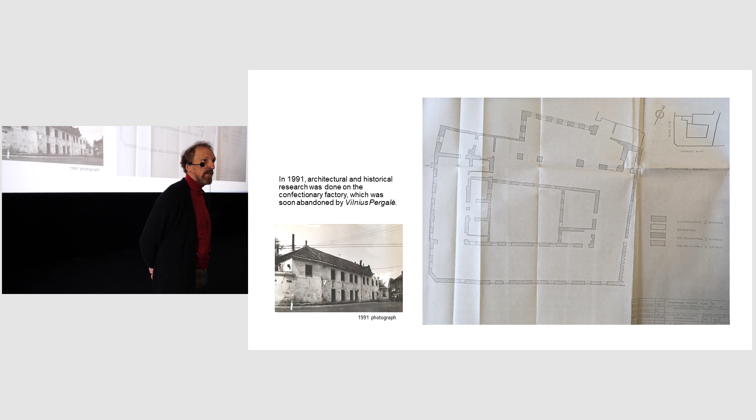We worked through Senojo Miesto Architektai, which we've been doing since 2005. There had been historic research done previously in 1991. The factory was still in operation, although at the tail end of its operation. We reviewed as much of that information as we could. It was very thorough, as thorough as it could be at the time.

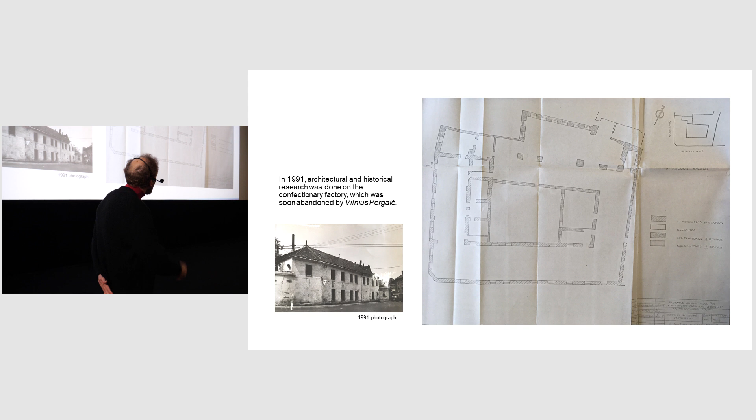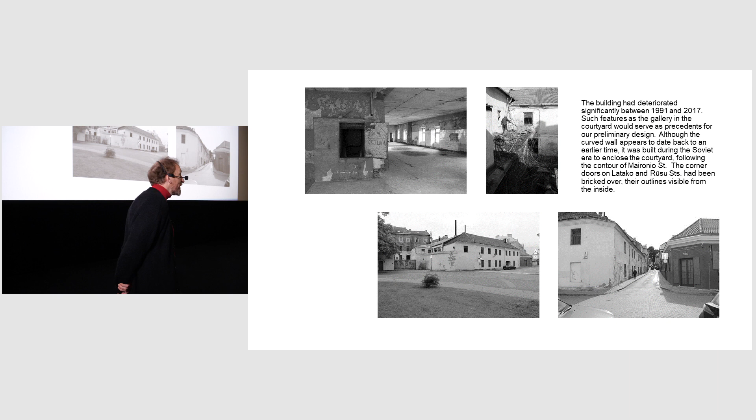You can see it simply divided, not so much by years, but by styles. After the factory moved to a new location, the building began to fall into ruin. It was already in fairly bad shape, but now it began to deteriorate rapidly. For 26 years it sat there on the corner, basically like a dead building.

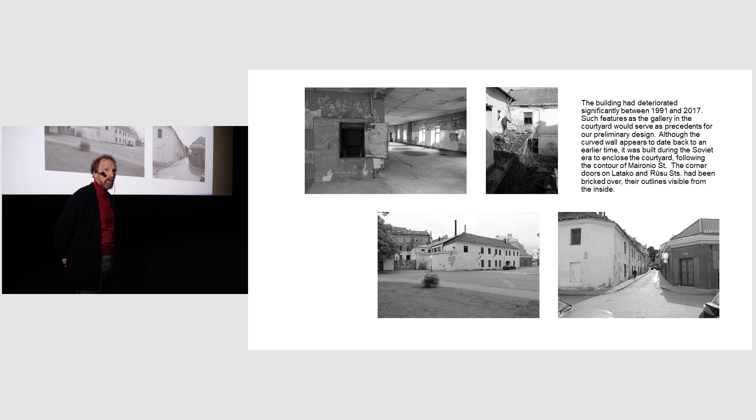But it is within the historic quarter, within the UNESCO World Heritage Site, and considered an integral part of it. It didn't have any unique number as of yet, but its fabric was considered important and needed to be thoroughly researched.

So in 2017, we initiated additional architectural research, archaeological research, historic research, and geological research to try to understand this building in more depth, particularly its low water table. This building was only 2.5 meters above the water underneath, and it was very close to the river.

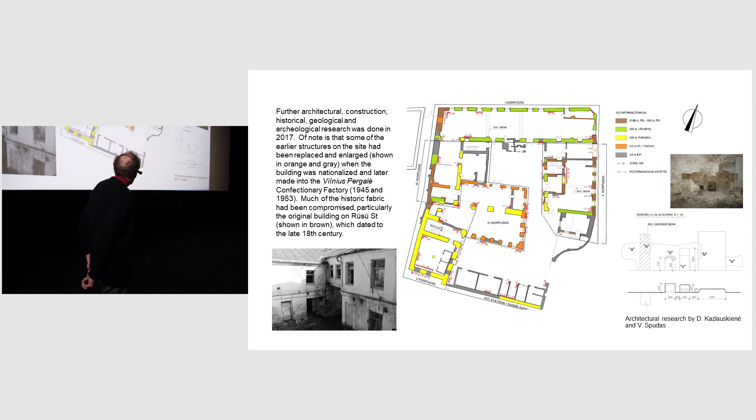You can see we had much more detailed historic and architectural research done at this time. We could very much see that this building was cobbled together over many years, roughly 200 years of additions. It's very hard to see what is original and what is not, because it's been parged over with plaster.

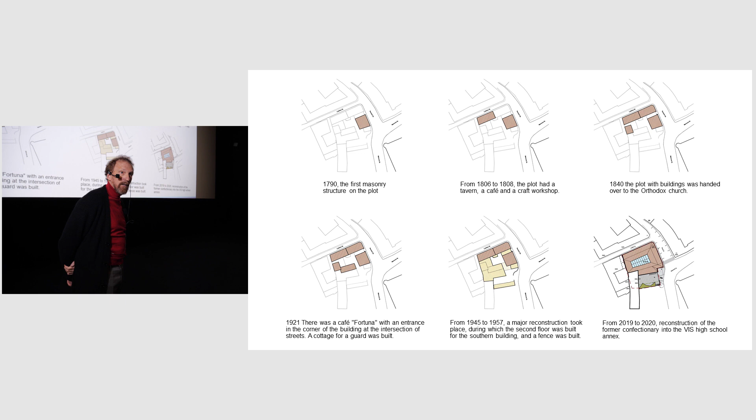Through the research we were able to divide its chronology of how it began. This building dated all the way back to the late 18th century. There was a one-story building on Rūsų gatvė, part of the old merchants and craftsmen's area in the Ruthenian quarter of the city. It began to slowly be added on to, becoming basically a crafts district, with merchants operating in it as well.

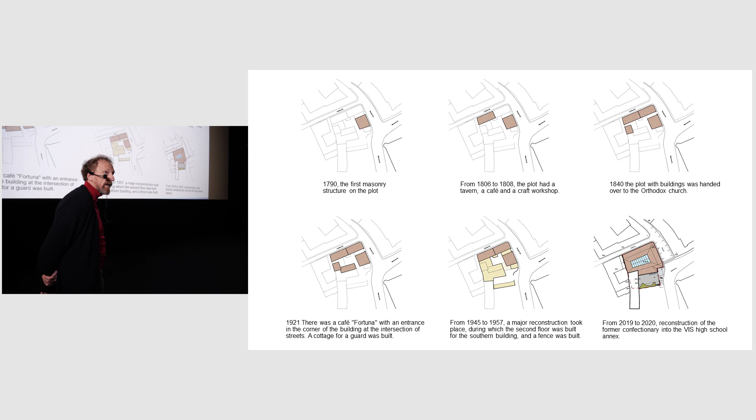In 1840, the buildings were ceded over to the Orthodox Church, which began to rent out the spaces to merchants and craftsmen. It continued to grow throughout the 19th and early 20th century, when it was made into a chocolate factory, the Fortuna chocolate factory.

The major renovation took place in the mid part of the 20th century, during the Soviet era, when Pergalė took over the building and added what you see as those yellow parts. Part of that was using a combination of historic walls and new walls. Finally, our conversion of the building in 2019, 2020, to what it is today.

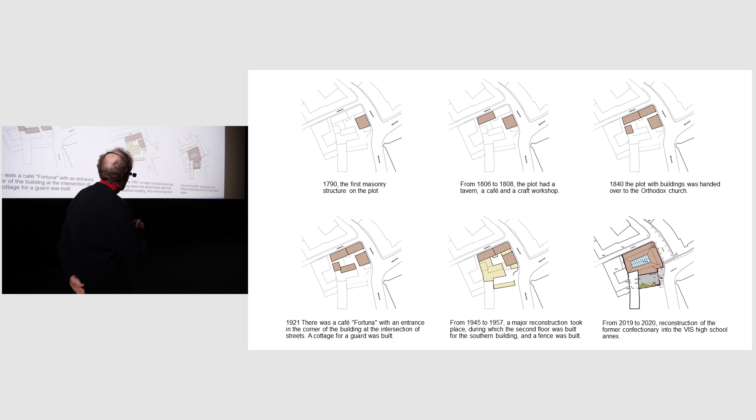Initial archaeological investigations revealed basically a whole little community underneath the building. We found wooden foundations and stone paving that dated back to the 16th century. These were just small pocket archaeological digs done at the time, and we knew we would have to do much more thorough archaeological investigation once construction began.

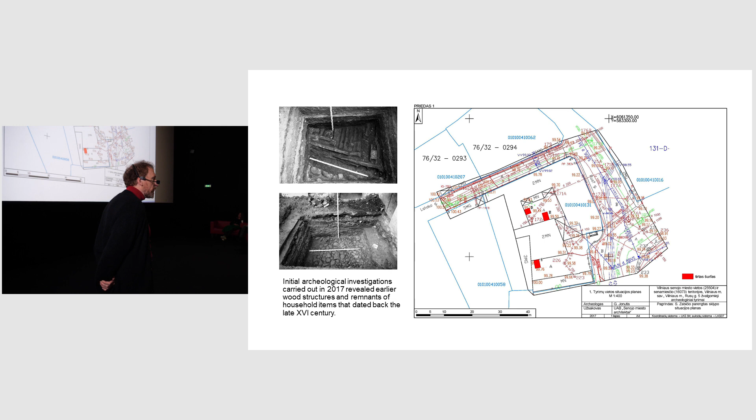But at least it gave us some idea what we were dealing with, and also helped us locate the water table of the building.

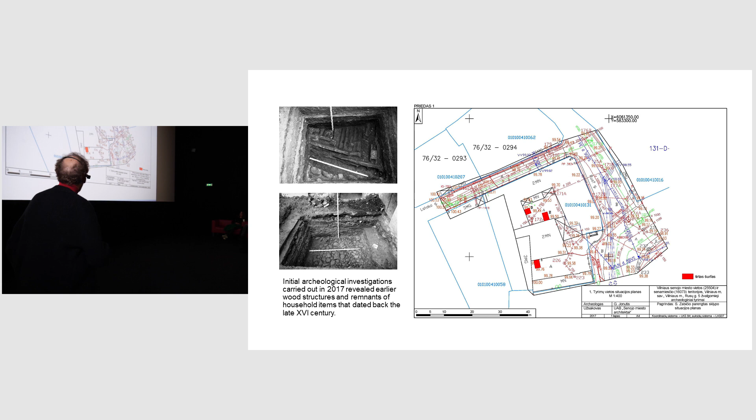Our initial conception went through several schemes, but finally we decided upon enclosing the whole building, turning it into a tech incubator. The idea was to make something that didn't look like a high school, something that would spur high school students to feel they were more part of a tech environment, especially given all their reliance on cell phones and everything else. We thought this would be a more exciting environment for them.

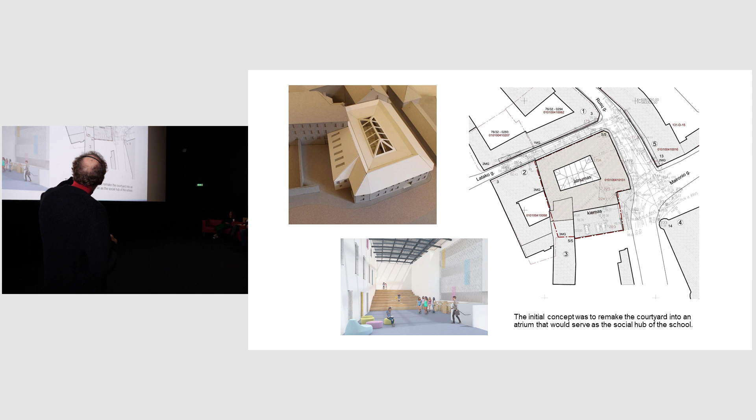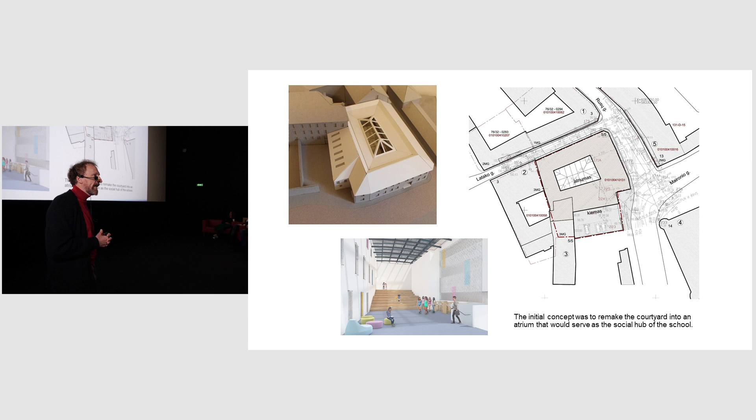Part of that concept involved turning the courtyard into an atrium, because that atrium we felt would be the congregation hall, the meeting area, where they could put on plays, put on any kind of functions they wanted, or just generally meet and discuss.

The school itself had a very liberal style of teaching, kind of modeled after the Finnish system. They didn't really have divisions. The idea was to bring students and teachers together on a constant basis, making it a more informal setting.

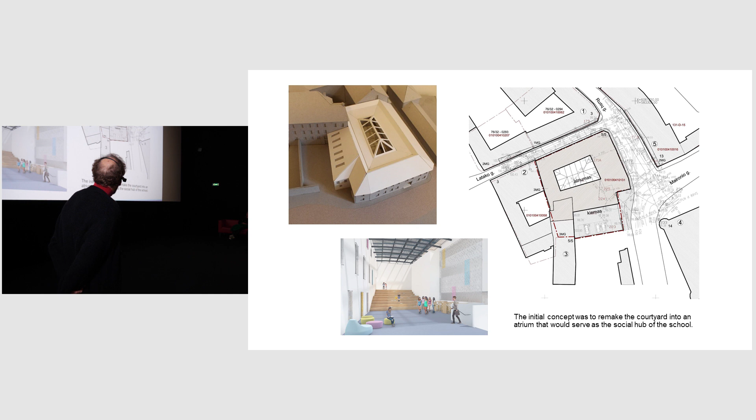Part of the problem we encountered was that as soon as we closed the courtyard, it became part of the square meters of the building. The Cultural Heritage Department told us that we couldn't use more than 80% of the footprint, so that meant we had to cut in on the walls.

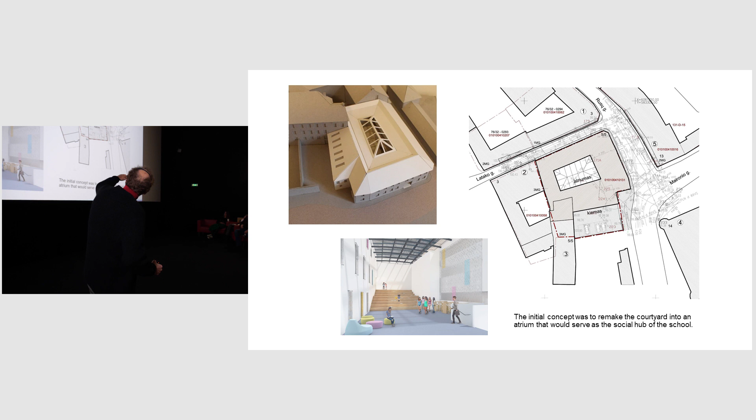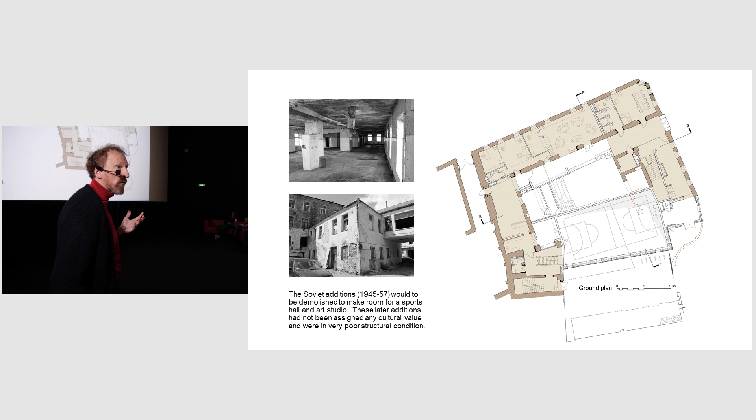What we basically did is we eliminated the Soviet addition. The Soviet addition was very hard to work with. It was not considered valuable, so we eliminated this portion of the building, and in its place we built a new construction, which was a new sports hall and art studios.

As a result, you can see with a red dotted line here, this was the original footprint. We had to shave in along the walls here and also not use the utility rooms here so that we could count the atrium space. Otherwise, it would have to stay a courtyard.

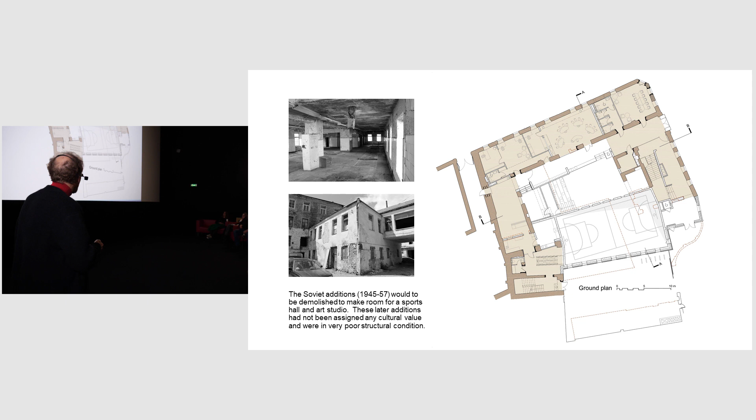So our initial scheme, of course, was to retain as much of the historic fabric as we could, to attain its original appearance. We were also limited in terms of roof height. We couldn't exceed the existing roof height of the building, but we still managed to squeeze an attic into that space.

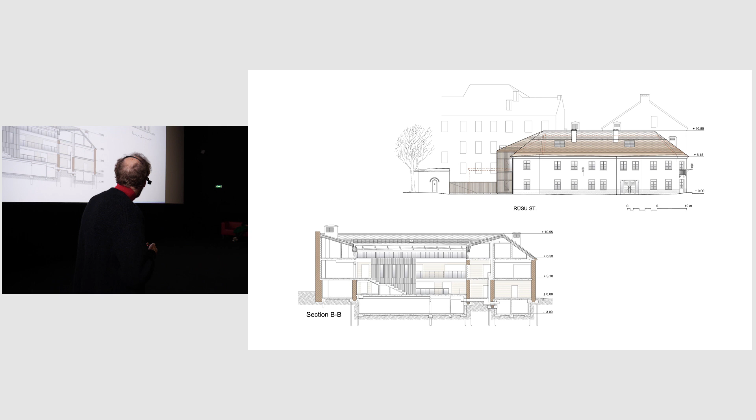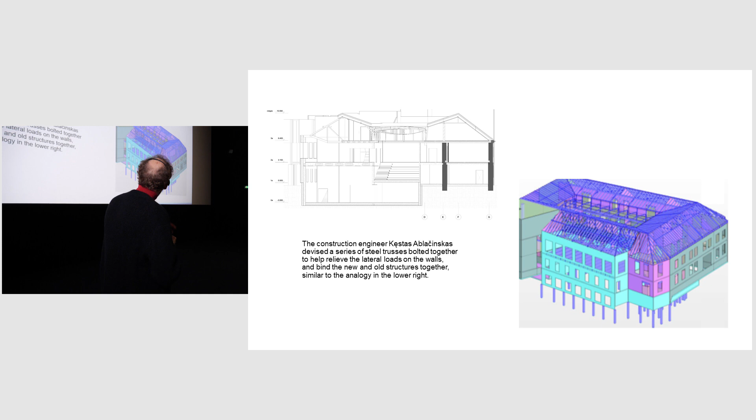In order to achieve this, especially since those old walls had been worked on so many times, they were not in very good shape, so we had to come in and shore up the entire foundation all the way around the perimeter. Our construction engineer, Kęstas Ablačinskas, devised a very elaborate metal truss roof system that essentially combined the old walls with the new walls.

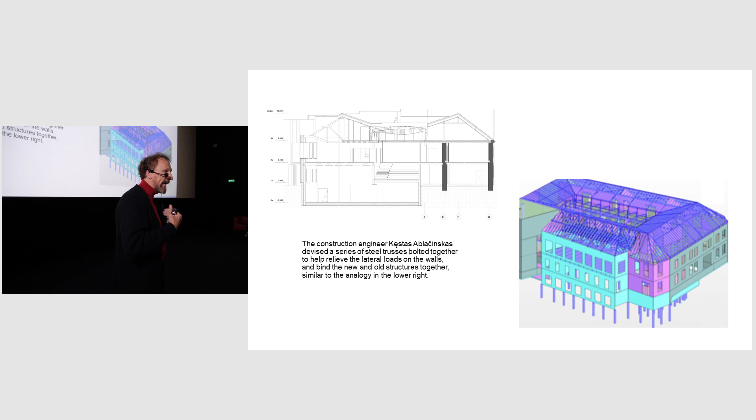Held them together into one, with the new concrete walls sort of acting as the anchor to that roof. And in this way, we could eliminate lateral forces that would potentially destroy the walls over time.

Because of the nature of the building, the open spaces, submerging the sports hall, we had to do a very thorough investigation on fire safety. Initially they were not very keen on the idea of an underground sports hall. They typically don't like that.

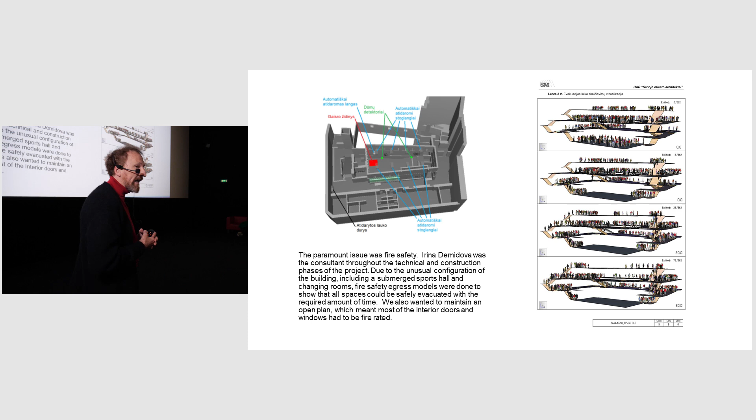But we'd already done a similar project with a sports hall with American International School. So working with Irina Demidova, we came up with all these 3D diagrams showing that all the students could be safely evacuated within the required time.

Then of course we did a thorough tvarkyba on the building, combining Kęstas' construction research along with Dana, who did the architectural research, in terms of tvarkyba, restoring the facades, waterproofing the base, trying to protect those walls as much as possible.

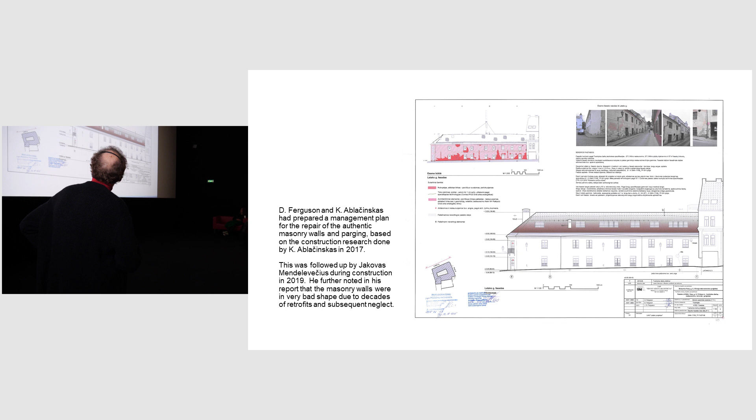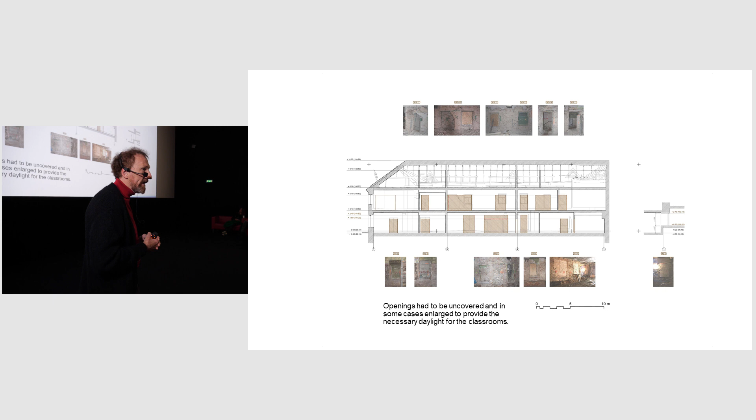Another issue that came up during construction was light. We have this now is going to be classrooms, and there are very strict regulations on the amount of natural light that you have to have into these classrooms.

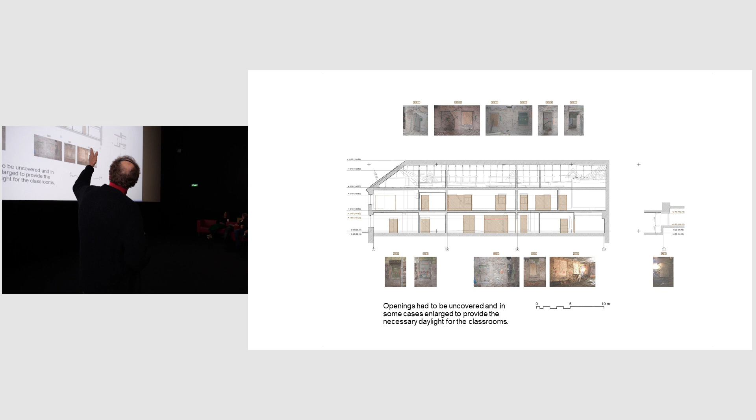So as a result, we had all these historic openings that had been bricked over during the time of the fabric, when it was made into a factory. So we opened them all back up again, and in some cases combined 2 openings into one so that we could get as much natural light into all the classrooms at all levels as we could.

And construction, demolition first began. Demolition had to be very carefully done because the building was not only very fragile, but there were people living above in the segments, or in this, it was a 4-story building in the corner.

So there were residents above that. We didn't want that to fall in. So there was a lot of effort done to stabilize the building in the process of demolition as well.

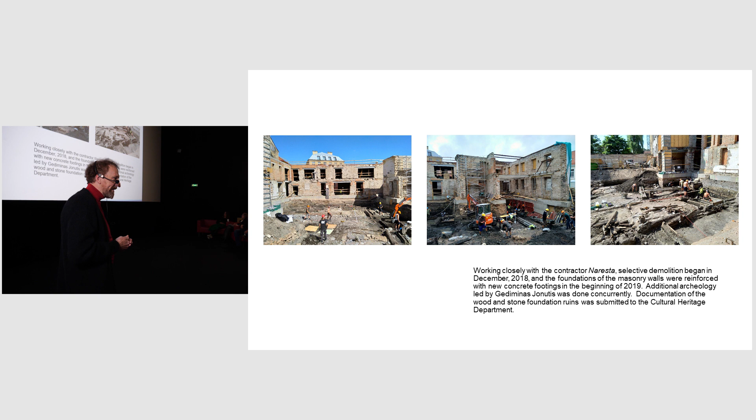You can start to see the village that emerged from the dig, with all the stone pavings, all the old wood foundation walls, lots of animal skulls, so there was some kind of farm element taking place underneath here as well. It was all thoroughly documented by the archaeologists.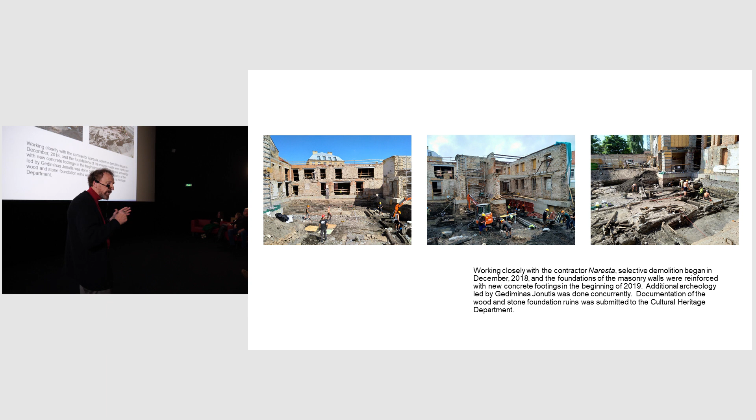Once the archaeology was done, which spread out through the entire summer into the fall, was about an 8-month process. It was very exhaustive and very painstaking. We could finally begin to bring the building up from the ground.

And because the building is very three-dimensional, there's multiple levels, not only just in terms of stories, but split levels as well. It was quite complicated, trying to get it all coordinated and make sure that all the pieces fit together properly.

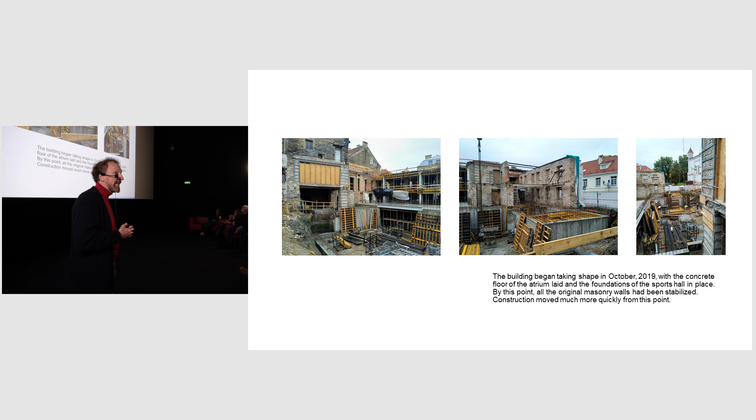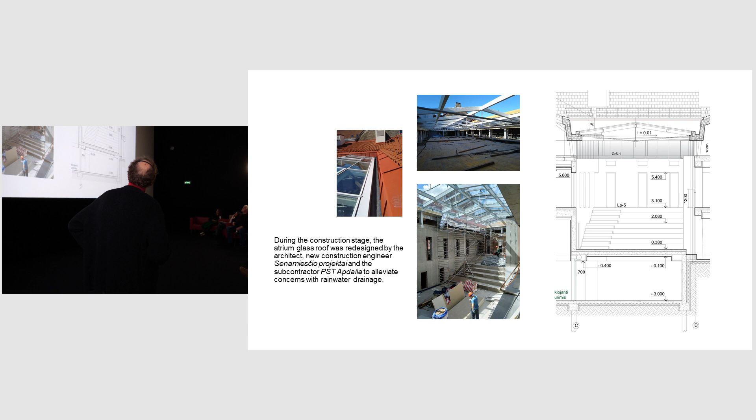As you can see, problems began to arise. One of the questions was the atrium roof. The contractor didn't like the design that we initially proposed, so we went through multiple variations to come up with a roof that everybody was comfortable with, that shed the water.

One of the interesting requirements within the Cultural Heritage Department is that the skylight has to be lowered. You have to create the illusion that the courtyard is still there, at least from an aerial view. So of course, when you sink the skylight into the roof, you basically create a pool, so this has to be drained, especially in winter with snow loads.

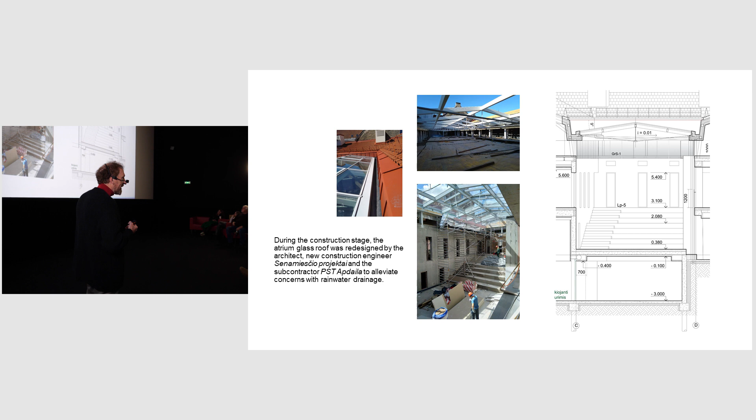So here we had to not only have proper drains all the way around, we had to heat them to make sure snow didn't stay on top of that roof during the wintertime. Fortunately, after 3 years, the roof is still not leaking, so it was a successful situation.

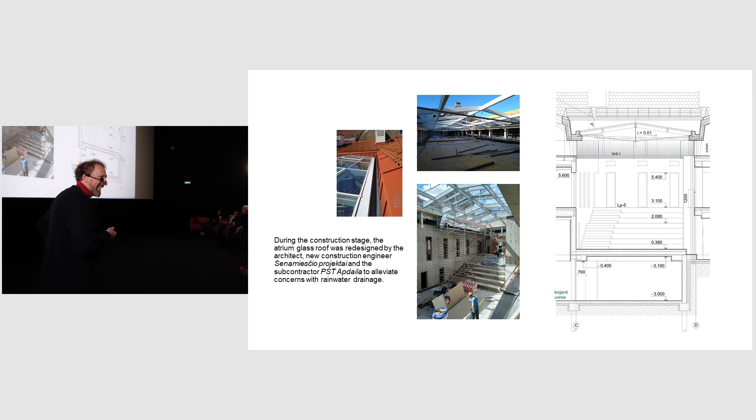And now we get to the interiors. We tried, as you can see, especially in that stair hall, where you literally see all the layers of construction. You see about 6 different layers of brickwork going on here. It wasn't like you had any perfectly preserved wall from the 18th or 19th century. All these walls had been worked on repeatedly, patched over, windows filled in, etc.

We even found an old fireplace that existed in one, so we kept that fireplace. As much as we could, we tried to expose the brick to give it a sense of warmth, especially in contrast to all the cool colors that were resulting.

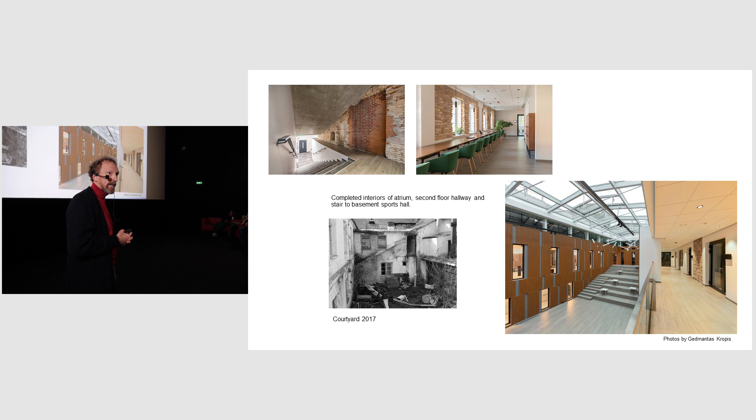And in the atrium, to help deal with sound issues, we used these perforated simulated wood panels, because we couldn't use actual wood panels for fire safety regulations. The idea was to soften that sound in that space as much as possible so it wouldn't become a reverberation chamber. We worked closely with Ecophon on a lot of the ceiling, especially in the sports hall, with their different types of paneling. And it worked very well.

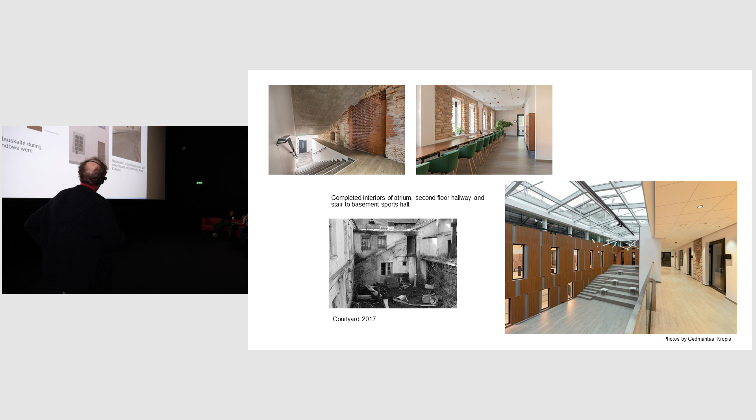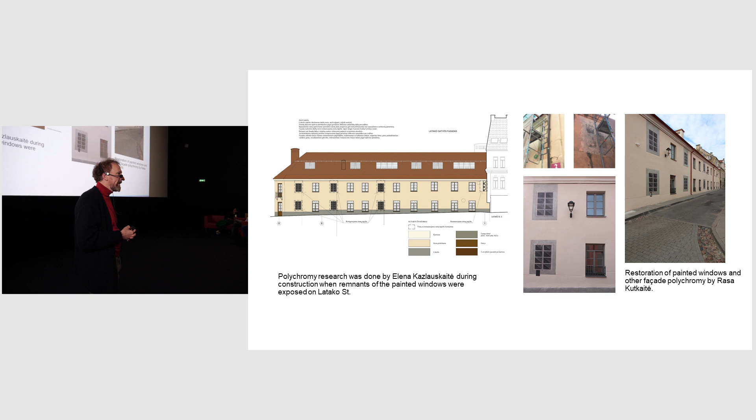So we tried to bring as much of that back to life to tell the story of the building, because we felt it was important, not just in terms of the city, so people can see that, but also for the students. The students need to know what kind of building they are in, that is part of history, part of the cultural heritage of Lithuania, and Vilnius in particular.

Where we went new, we went completely new. We wanted to make that contrast. We wanted to show that this sports hall and this art studio is a new structure, not an old structure.

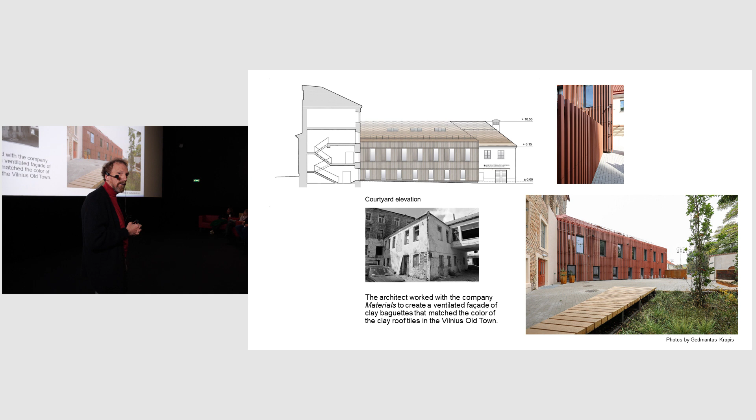But obviously it was important that it was sympathetic to the historic materials. So working with a materials company, we came up with these clay baguettes using the same terracotta color as you see on the roof and throughout the old town, because we felt that would work nicely. What's really nice is you get multiple effects depending on what angle you're looking at that facade. We kept the rhythm of the openings, a bit of historicism there, but for the most part it was a very modern addition.

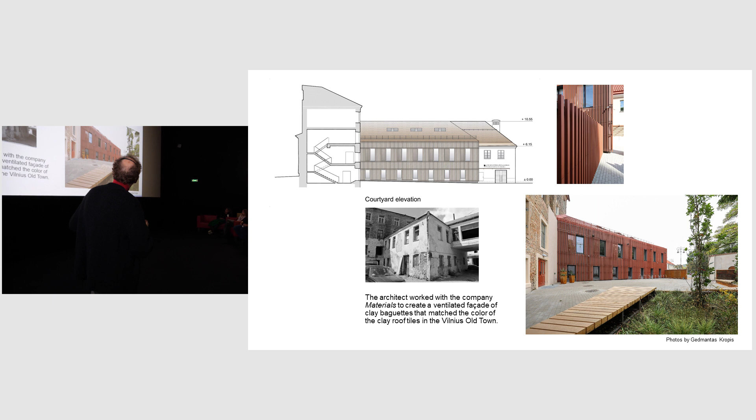So the building has multiple faces. It has a corner, and as you look at Rusu and Latako streets, you can see what it would have looked like in the 19th and early 20th century. As you turn around the building, you see what it's become now in the late 20th and 21st century. So this is quite a change.

A lot of people were really worried when we tore down that curved wall. They thought because it was curved, it might have been a Baroque element. But no, it was built during Soviet times. It simply follows the curve of Maironio Street, a very narrow wall. So we didn't see any value in the wall. We wanted to open it up, because that would be the main entrance for the students to come into the school. It was more important for us to have that area open.